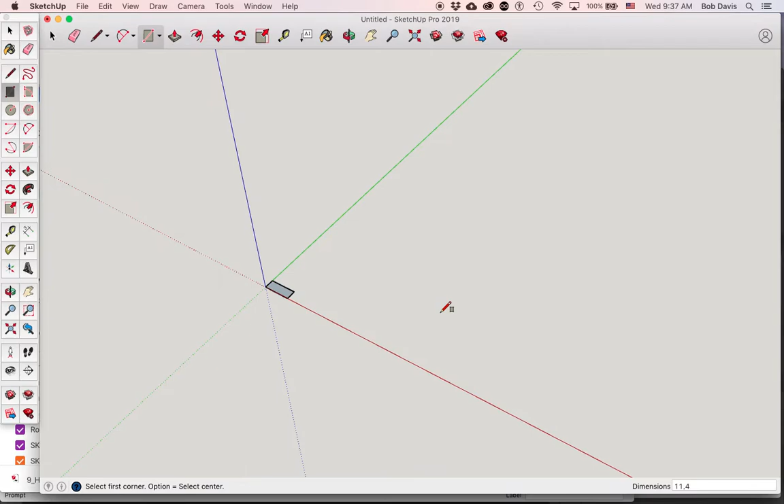We will place the tool at origin, click, move over, and we're going to type 11, 4. So this rectangle is going to be 11 inches long by 4 inches wide. Press return, then Shift Z to zoom in.

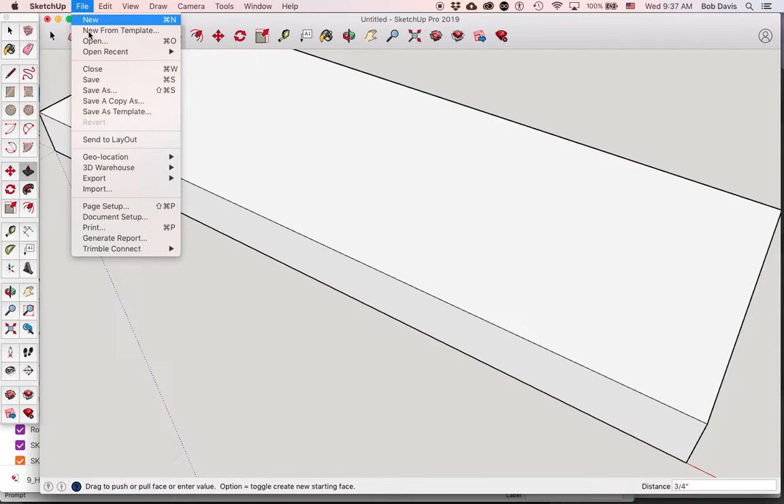We will then get our push-pull tool, click the surface, and move the surface up 0.75, and press return. I'm going to go ahead and save. I'm going to call this base, and save it in Documents, and click Save.

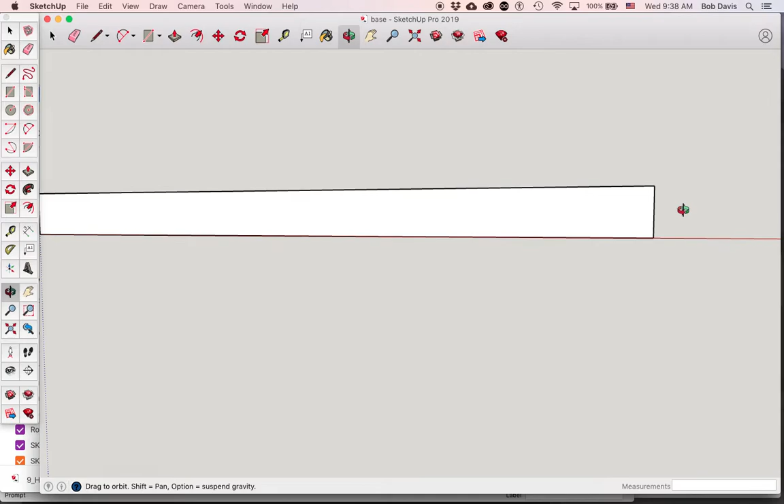Next thing I'm going to do is zoom in to this area right here, using the Orbit tool. With my cursor placed just to the right of the end of this piece, I'm going to take two fingers on my trackpad, not pushing the button, and slide them forward, which zooms me into this corner. Then if I want to, I can straighten it out a little bit. You don't really have to, but if it makes you feel better, go ahead.

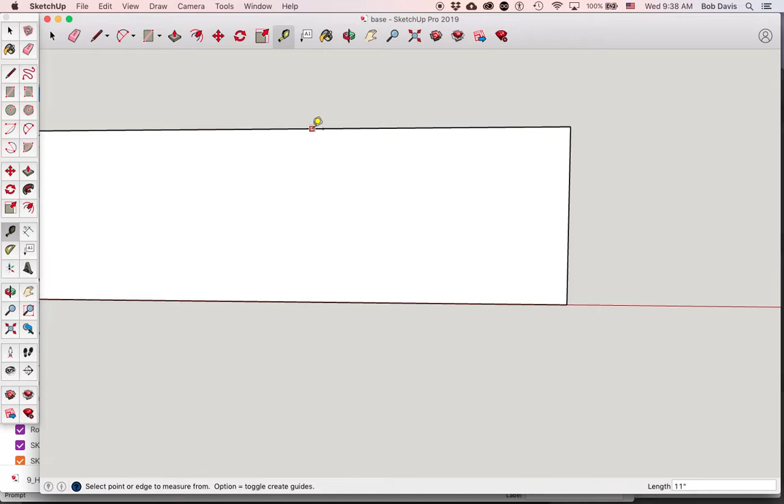I'm going to take my tape measure tool and create a series of guidelines. I'm going to click on the top, and come down 1/16 of an inch.

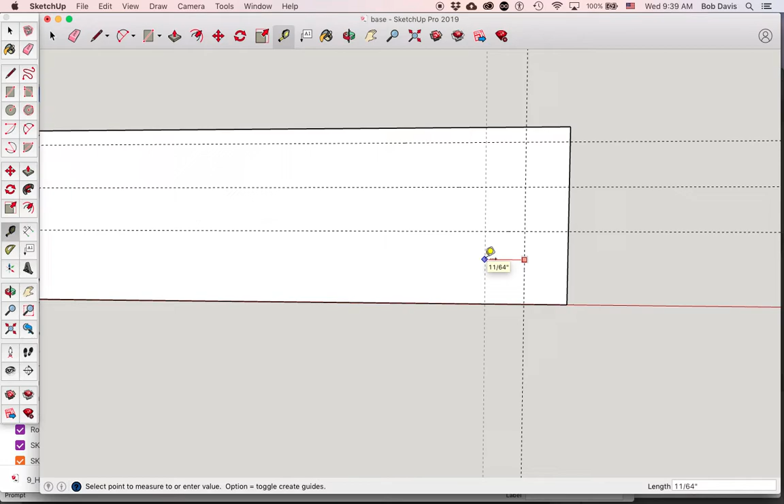I will then come down 3/16 of an inch, and from that guideline, come down an additional 3/16 of an inch. From the right side line here, I'm going to come in 3/16 of an inch, and from that guideline, come in 3/16 of an inch. So essentially, 4 of the 5 guidelines were 3/16. The only difference was the very first one, which was 1/16 of an inch.

I'm next going to use my pencil tool to create a line from the top of the piece to the intersection of those two guidelines. Then I'm going to press Escape, which keeps me from drawing any more lines.

I will then come over to the Arc tool. I'm going to click and hold and select 2-point arc. With the 2-point arc tool, I'm going to click at the end of the line I just drew, go diagonally across this box, and click at the intersection. That establishes the two endpoints of the arc I'm creating.

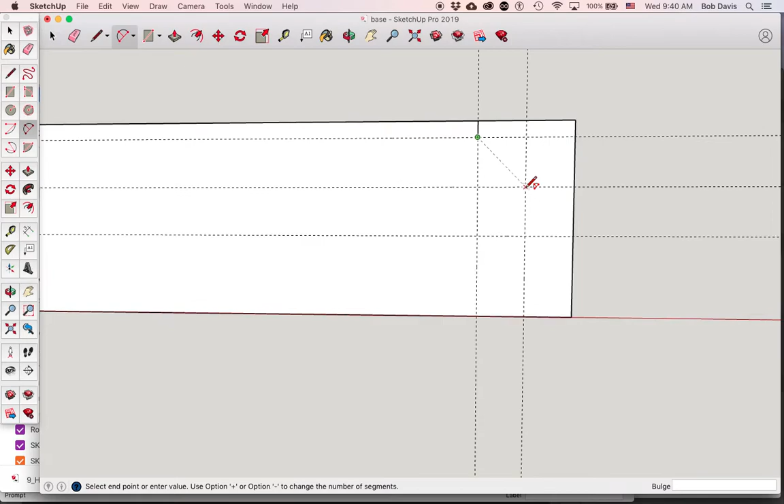I will then move my mouse up just a little bit, and type in 3/64 of an inch. You can see that at the bottom of the screen where it says bulge. I used 3/64 of an inch, and I press return.

I will then repeat that process from the end of that arc diagonally to the other arc, but this time, instead of making the bulge go up, I'm going to make the bulge go over. Again, same number, 3/64, and I press return.

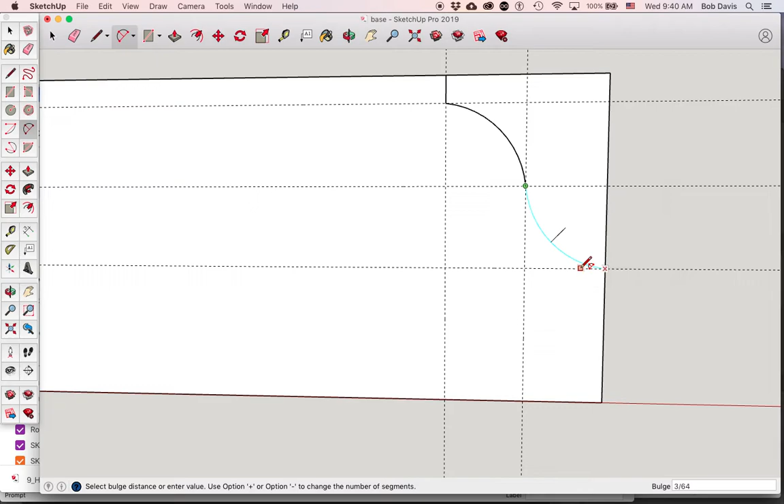Then going to orbit a bit, and this is essentially what you should see. I'm going to go under the Edit menu and delete the guides.

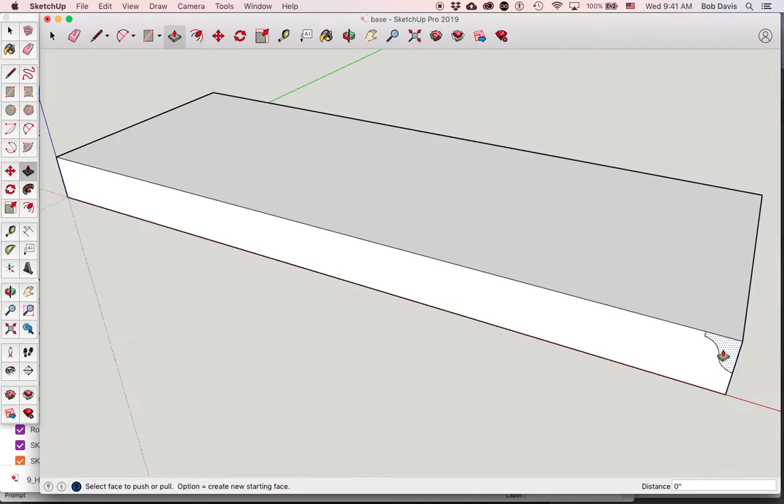Now, you can see with the Push-Pull tool, I could push this surface, or I could push this surface. However, if I push this surface, it does create the edge I want, but it only does that on the end of the piece. I don't want to do that, so I'm going to undo that.

Undo is Command Z. Instead of using the regular push-pull tool, I'm going to use a special tool. It really works like the push-pull tool, but it's allowed to go around corners. It's called the Follow Me tool, so I'm going to select it.

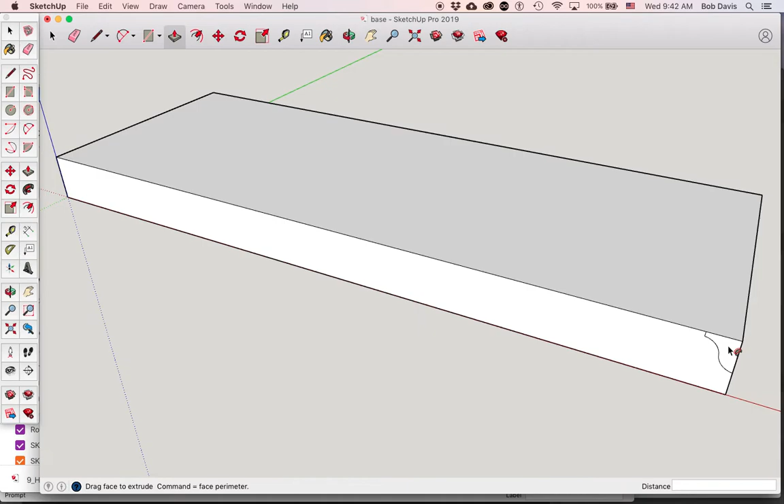Now this is a little different than what we're used to. It's highlighted now, but when I click, it actually unhighlights. It's okay, just trust that you've clicked there. So I click on that shape, hold the Command key down, and move my mouse to the top of the object, and click. What it does is take that shape and wrap it all the way around the top.

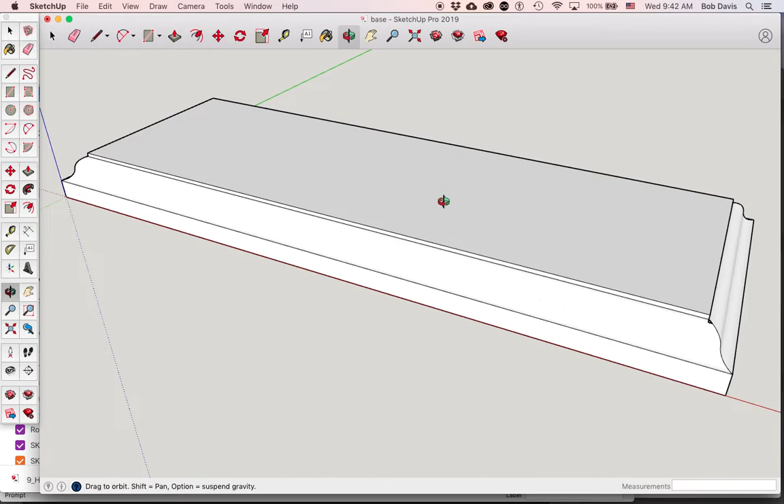Now, I'm going to add a couple holes to the top surface. To do that, I'm going to go to Camera, Standard Views, Top. Now I'm looking at the object straight on. I'm going to get my tape measure tool.

I'm going to click on the end of the line right here, click here, and come over 1 5/8. If you look down at the bottom of the screen, it shows what I just typed, 1 5/8 of an inch, and I press return.

I then click on that line, and move over... that was incorrect, 5.25 inches, and I press return.

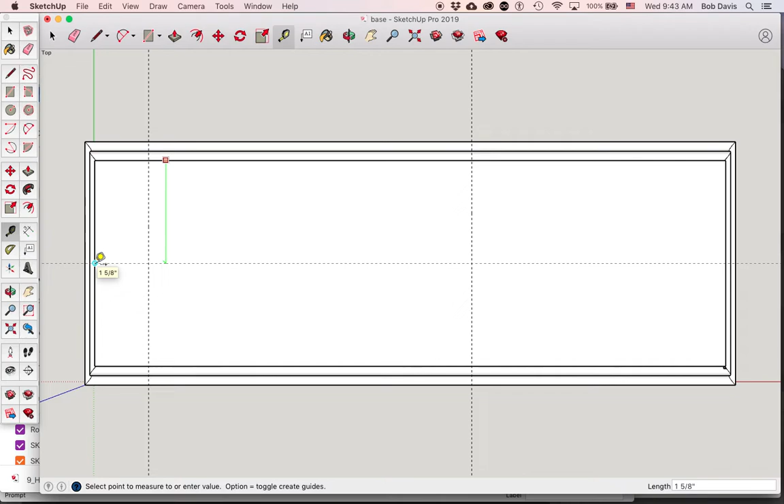Then, from the top line, click on that top edge. I'm going to start moving my guideline down. But as I'm moving it down, I'm going to move my cursor over to this end line, because as I move down, it will find the midpoint of this. It'll turn blue, and I'm going to click there, and now I have two intersections to place my holes.

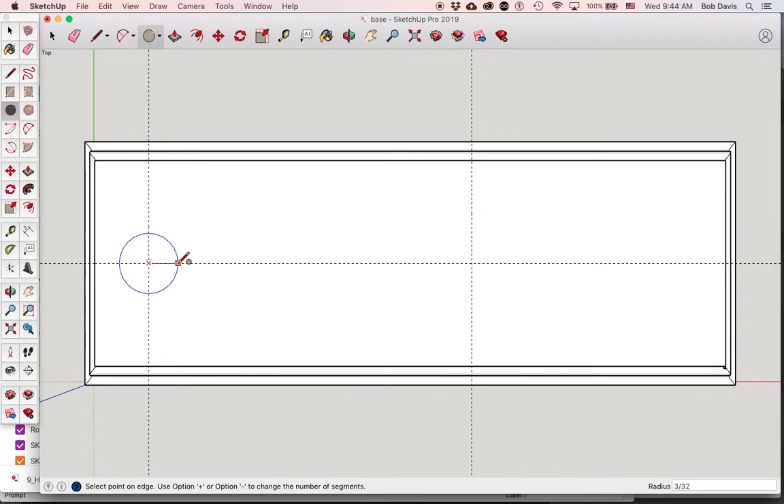I'm going to get my circle tool, go to the intersection of those two lines, click, move out. Remember, stay on axis—you can go straight up or straight over, doesn't matter, but be on an axis. I'm going to type in 3/32, which will give me a diameter of 3/16. I press return. I then come over this way, click, move, type in 3/32 again, and press return.

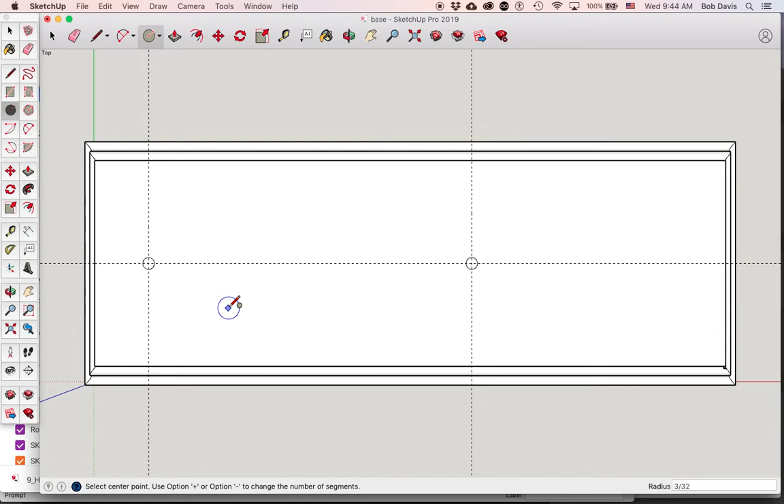I want to push those holes through, but that's very difficult to do when you're looking at the object straight on. So again, I'm going to orbit, zoom in, get my push-pull tool, and push down.

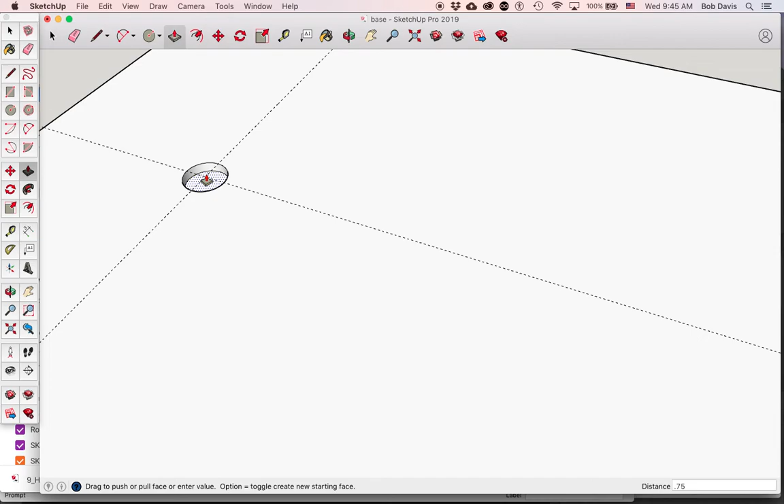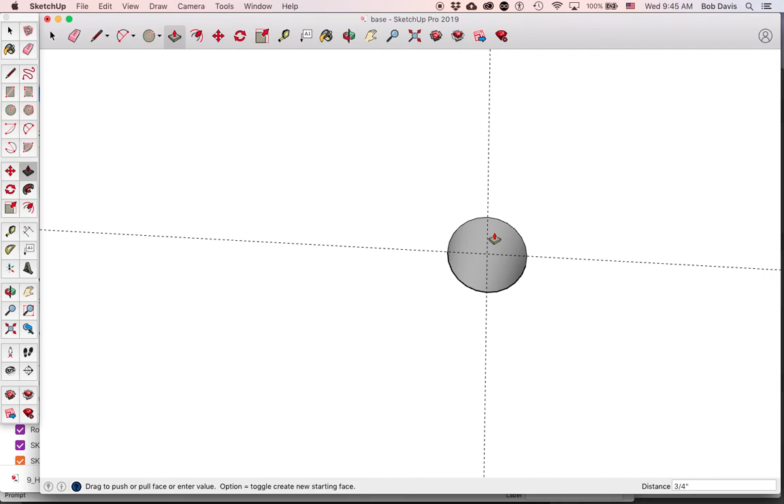0.75, which was the overall thickness of the piece, and I press return. If I orbit this now, I should be able to see that is now a hole. I'm going to zoom out of that one, zoom into this one, click, move down, type 0.75, press return, and it's a hole. So now when I look at it from the top, it looks like this.

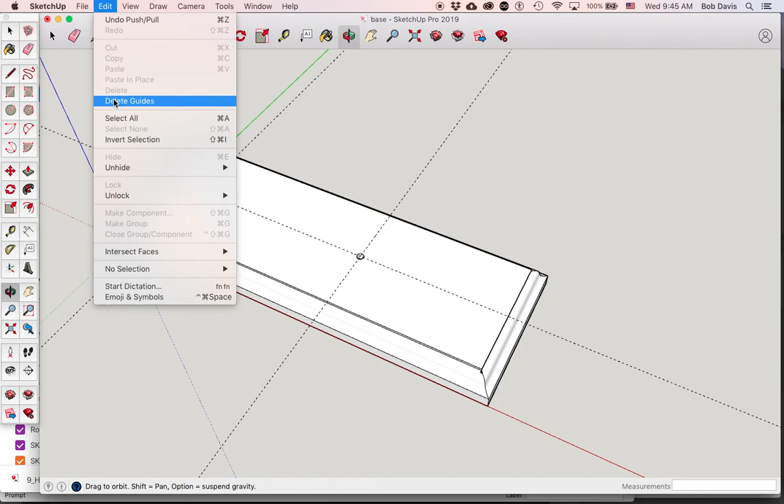If I orbit it to the bottom, it should have two holes. I'm going to go under my edit menu, delete guides, then file, save, and we are done with the base.